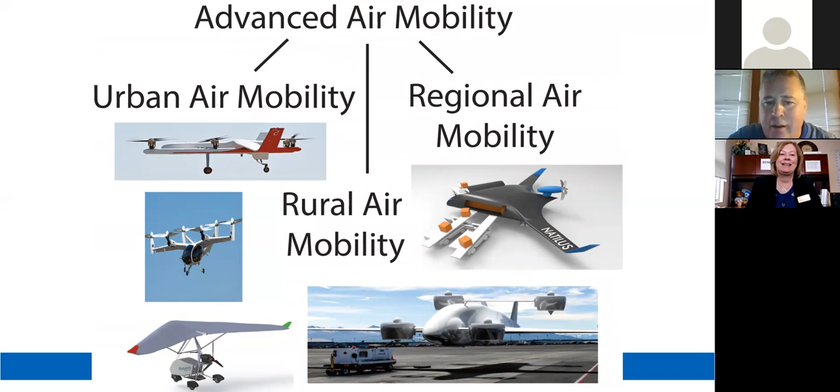So some general assumptions for urban air mobility operations are short distance within and around the metro area, suburbs, exurbs, low capacity vehicles with high volumes of flight, short turnaround between the flights, close scheduling with minimal takeoff to land and route delays, and operating at low altitudes.

So urban air mobility is a subset of advanced air mobility. While advanced air mobility supports a wide range of passenger, cargo, and other operations within and between urban and rural environments, urban air mobility focuses on the transition from traditional management of air traffic operations to the future passenger and cargo carrying air transportation services within an urban environment. So urban air mobility is the transportation of people and cargo in an urban area using a small electric vertical takeoff and landing type aircraft.

And then in 2014, they came out with the Section 333, which was one of the first regulations that allowed commercial applications of small unmanned aircraft, 55 pounds or less, below 400 feet, within the national airspace. And then back in August of 2016, we had the passing of the Part 107 remote pilot certification, which gave more oversight for commercial applications of small unmanned aerial vehicles in the NAS.

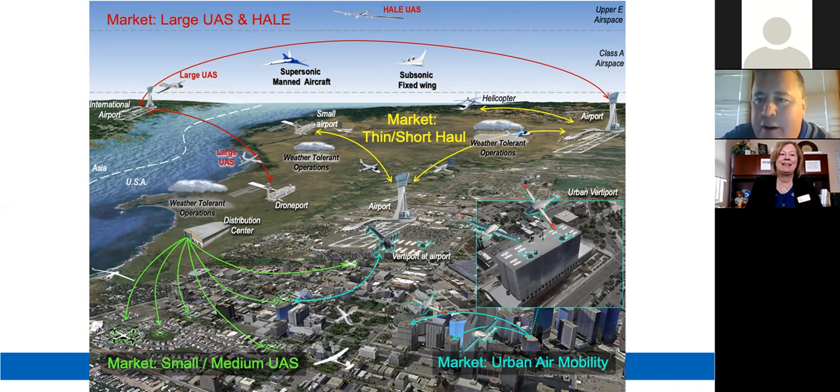And we could see some of the other operations that are happening at higher altitudes and bigger aircraft in Class A airspace, and then above Class A, in upper E airspace with high altitude, long endurance type of unmanned aircraft for communications or surveillance applications.

AAM has a wide range of markets. Based on research I've done, some of the big markets are going to be with military to start off with, and then remote areas, ship to shore, transportation of cargo and people, emergency medical supplies, evacuations, law enforcement operations, news gathering, weather monitoring, and ground traffic assessment.

So before we take a look at advanced air mobility operations in the NAS, it is important to evaluate the current state of the U.S. national transportation system to help determine potential markets for AAM air carrier operations. For example, looking at trucking delays and congestion areas and determining if advanced air mobility operations should be considered as an alternate mode of transportation for areas where there is a need for cargo but no airports, roadways, railways, or waterways to deliver it.

Examples could include northern territories of Canada, remote areas of Alaska, or remote areas within the United States. Another benefit of the research I've been performing is that it could reveal advanced air mobility niche markets and find potential lucrative AAM air carrier supply chain routes. Any disruption in the transportation supply chain caused by weather, no infrastructure, poor infrastructure, trucking congestion, or driver shortages could be possible market opportunities for LUCA air carrier operations.

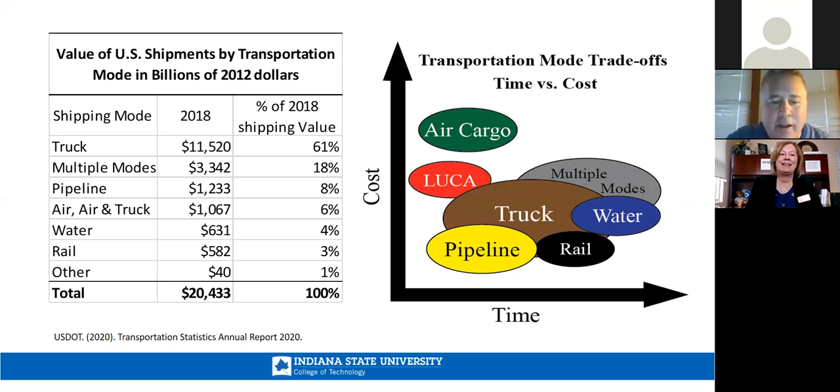As we can see, truck has the biggest oval and it encompasses the biggest shipping mode. Multiple modes just means it's gone, say, by water, truck, or train, and then back to truck to your final destination. Then you can see the red oval for LUCA. That's where I forecast the cost will be much lower than air cargo operations, but the time it takes to deliver cargo from point A to point B will be much less. So that's where I see the market for large unmanned cargo aircraft.

A recent paper from NASA suggests that the smaller local airport you may not have previously known existed will soon be a catalyst for change in how you will travel. Regional air mobility seeks to fundamentally change how we travel by bringing the convenience, speed, and safety of air travel to all Americans, regardless of their proximity to a travel hub or urban center.

And most people, just like I was saying, live within about 16 minutes of an airport. Yet 1.6% of all trips between 50 and 500 miles are taken by air, so only 1.6%.

There are over 5,050 underutilized public use airports. While we have all those airports, the FAA continues to fund them with $3.2 billion in annual grant funding to these local airports. And despite that, only 0.6% of US airports currently support 70% of domestic air travel here in the United States.

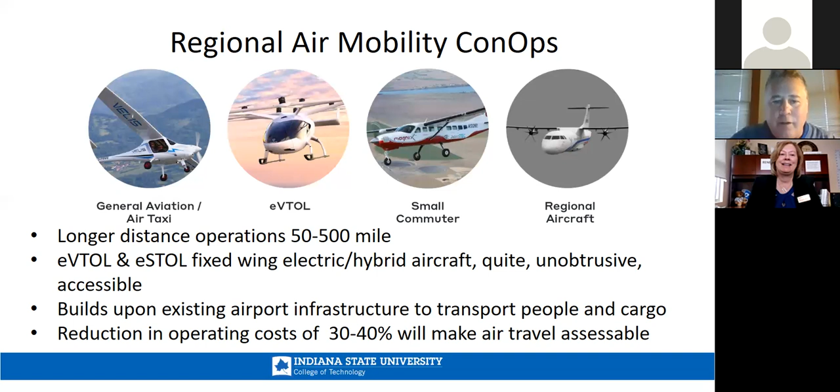One of the key drivers here is reducing the cost of maintenance and overhead by 30 to 40%, and that can be passed down to the travelers, the passengers, equating to much lower transportation costs today. That's mainly by electrifying the aircraft and removing the pilot to reduce some of those costs. Electrifying the aircraft removes the ICE engine, the internal combustion engine, which has thousands of moving parts, down to relatively few moving parts. Fewer parts means less maintenance and less cost, so that's one way the industry should get to that point.

So these are other basic principles and assumptions that came out of that concept of operations manual. Urban air mobility will operate within FAA regulations and the technical environment incorporated within the NAS, and will always maintain the safety of the NAS as it is today. Operators cannot optimize their own operations at the expense of sub-optimizing the environment - one key factor being sound, noise, emissions, and costs. We also see that the FAA has on-demand access to information regarding urban air mobility operations.

And then here are some other assumptions. Airspace management will be structured where necessary and flexible when possible. Cooperative traffic management is conducted in compliance with a set of community-developed and FAA-approved community-based rules. The FAA can set the aircraft performance requirements in order to optimize capacity in the NAS.

So that's some of the things that they're doing. In the next few slides, we begin to discuss the unmanned traffic management system that they're going to be implementing.

Some of the key motivators here are strategic deconfliction and tactical separation occurring without direct ATC involvement. Urban air mobility will establish community-based regulations as standards for operation.

NASA has developed and tested detect and avoid alerting logic for unmanned systems called DAIDALUS. They've made recommendations to the FAA, and the FAA are now using those recommendations to come out with standards.

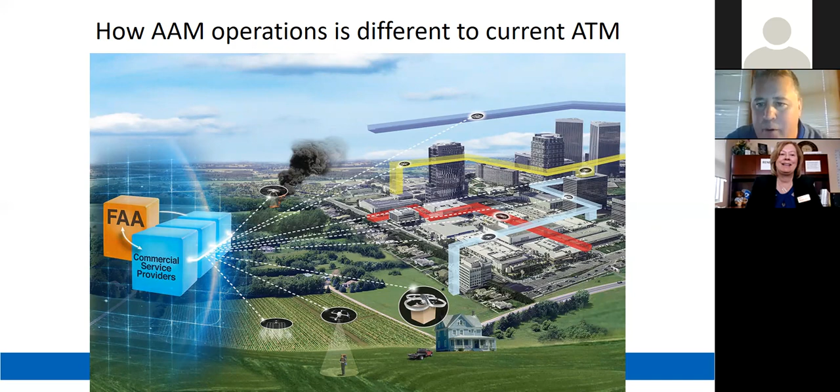We could see some of those corridors in this figure. You could see, in red, yellow, and blue, some of those corridors and how users would go from point A to point B. So, advanced air mobility aircraft technology levels.

This is kind of going over where we're at today. We're kind of at humans with technology within the loop. This means the human is always in direct control of the automation. So that's kind of where we're at today.

And as systems and automation improve, the technology will take over for the human element of it. So human on the loop is where the human has supervisory control of the automation, and the human can actively monitor the system and take control if needed.

And then one of the most advanced forms of automation is where the human is just over the loop, passively monitoring the system and informed by the automation if and what action is required.

So this is where we're going to see two-person cockpits move to one-person cockpits, where the human is still kind of in the loop, but that second human pilot is on the ground in a control center somewhere, helping that pilot in the air.

And it'll eventually be a collection of pilots on the ground in the control center, kind of monitoring and operating a collection of aircraft over time.

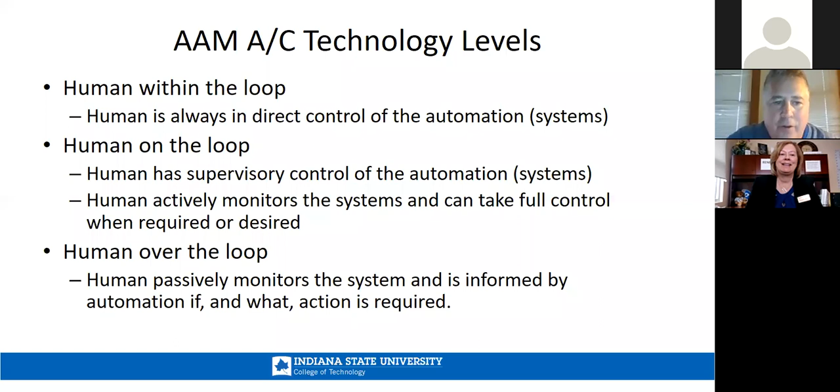And the final form of that automation is where the human is over the loop, monitoring the system.

And here's some of the early to intermediate technology levels for AAM. Garmin has come out with the G3000. This is a cockpit that will probably be implemented in some of the newest and advanced air mobility and urban air mobility aircraft.

The humans will probably do the manual takeoff and landing until the autopilot systems and technology take over. And then pilots will probably use see and avoid in the interim until the FAA have developed the regulations for detect and avoid.

And then detect and avoid -- this is kind of a representative of the DANTi screen that users and remote pilots will see.

The arrow in the front is a representative of the aircraft, and each ring is 5, 10, 15 miles, just depending how far. This gives you a 360-degree view of all the objects, planes, birds, other objects that could be in the airspace.

And it provides advisory to the pilots and recommendations to the pilots. This is an example of a screen that might be used.

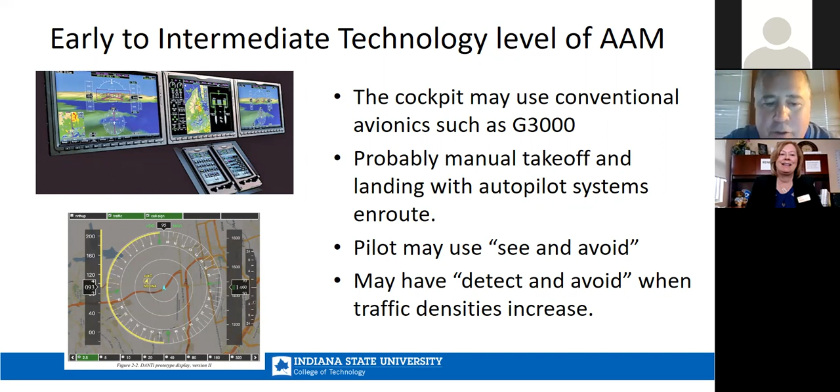This illustration from the FAA showcases different operating environments and types of airspace: G, E, and D airspace. It shows the corridors. To go up through the corridors, aircraft have to pass through 400 feet into Class E airspace, get into the corridor, and as they transition through it, they'll have to descend through that corridor down to land at a vertiport. So those are the types of operating environments.

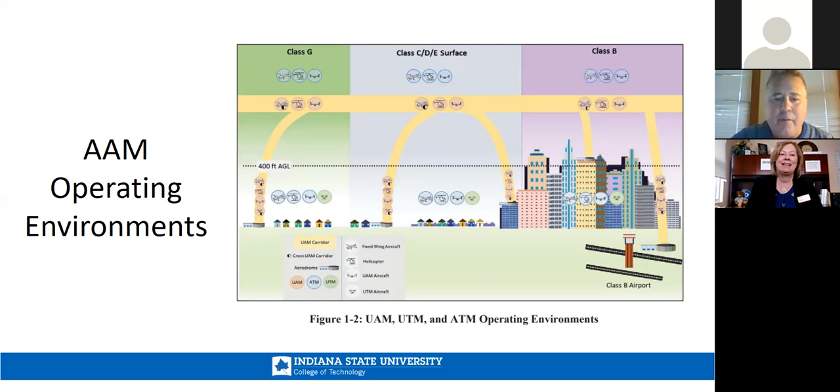As airspace becomes more congested, we'll see them use corridors. Initial operations of eVTOL aircraft will share airspace with other aircraft, potentially on existing helicopter routes or early predefined flight corridors. Aircraft may fly along similar pathways simultaneously and be layered with other commercial air traffic. Pilots will need to manage flights in close proximity to other aircraft and be alert to react should other traffic deviate from their planned routes.

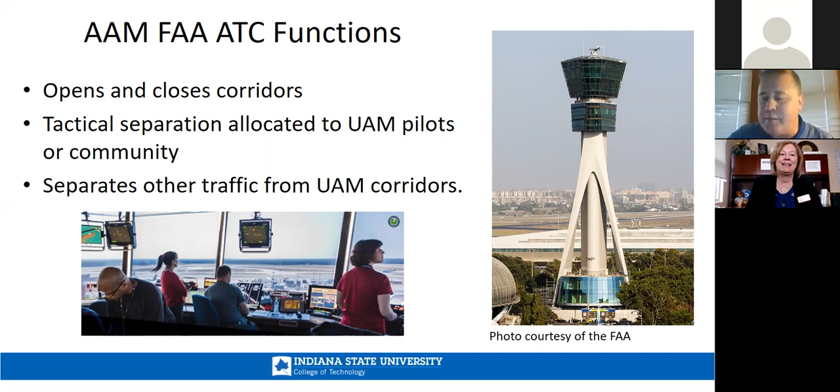So that's kind of the path. Whether that happens in the future still remains to be seen. A lot of research needs to be done in this area to move from voice communications to digital communications. That's a limitation right now today—we still have to operate by voice, especially if there's a deviation in the flight plan.

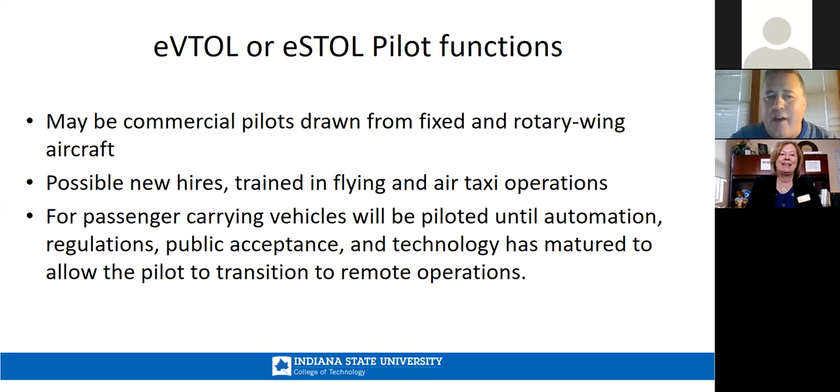So, electric vertical takeoff and electric short takeoff—the pilot functions. The pilots may be commercial pilots or drawn from fixed and rotary wing aircraft. There'll possibly be new hires trained in flying air taxi operations. Passenger-carrying vehicles will be piloted until automation regulations, public acceptance, and technology has matured to allow that pilot to transition to remote operations from a control center.

Flying eVTOL, short takeoff and landing, or conventional takeoff and landing aircraft, UAM pilots will need additional experience to meet the unique capabilities and design of these aircraft. They'll need to navigate in a challenging traffic management environment, coordinate with other traditional airplanes and helicopters, and fly at low altitudes in changing micro weather airspace with noise abatement restrictions. They'll have to operate large amounts of takeoffs and landings in a relatively short period of time. Total flight time should be just between 4 and 12 minutes.

For more advanced air mobility operator functions, those operators will get Part 135 or Part 137 authorization—air carrier or agricultural certification, and in time, as the aircraft get bigger and operations become more robust, they'll eventually be governed under Part 121 operations. Those operators will be responsible for regulatory compliance and all aspects of urban air mobility operations. They will use a flight follower—kind of a glorified dispatcher—who works for the operator and fulfills the normal dispatcher role.

So a little bit about the community compatible aircraft in urban air mobility. It's low emissions, low noise, sometimes steep climb and descent profiles greater than 3 degrees, which will reduce nuisance factors to communities. These include hybrid aircraft, electric VTOL, and short vertical takeoff. Aircraft propulsion can reduce environmental impact, noise, and operating costs.

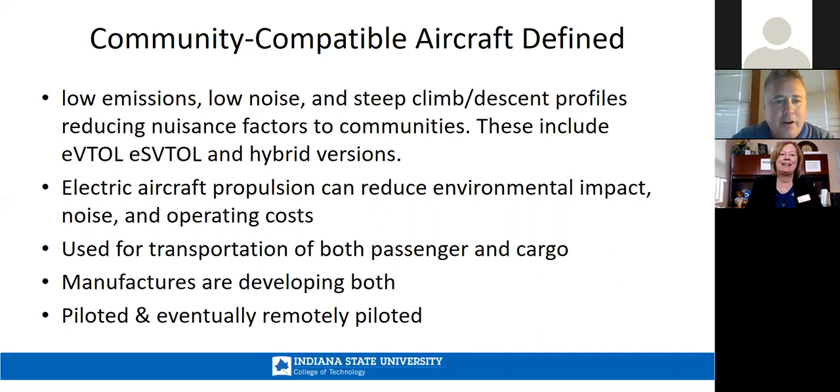Only recently has the U.S. military started using unmanned aerial vehicles to fly cargo. In 2010, the U.S. Navy contracted Lockheed Martin Corp and Kaman Aerospace to build the K-MAX heavy lift cargo helicopter. At that time, the Navy had contracted for two optionally piloted aircraft. They were tested in combat in Afghanistan in 2011 to fly cargo resupply missions for the Marine Corps. The K-MAX demonstrator program was a success, helping keep truck convoys off the road and reducing the threat of improvised explosive devices.

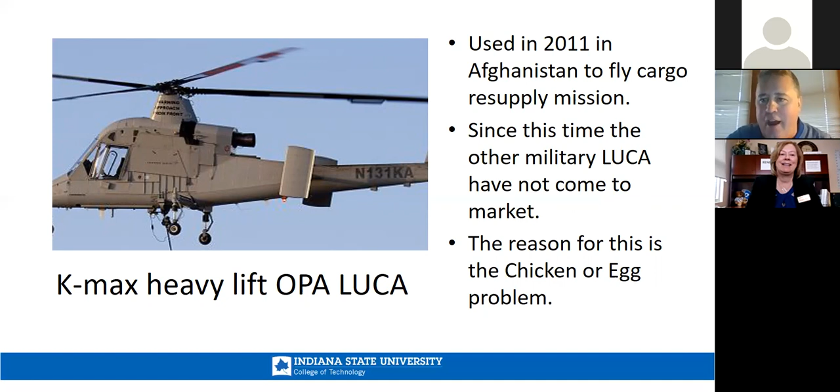Since that time, other military LUCA have not come to market yet. It's still the chicken or the egg problem, but the commercial sector has stepped up the game. We're starting to see that with commercial companies like Reliable Robotics and X-Wing converting manned aircraft to optionally piloted aircraft, starting to do that with large unmanned cargo aircraft.

One of the limitations to getting these regulations passed is the data set. In a manned aircraft, if something goes wrong, the pilot can take over and land it, but they don't necessarily report that data to the FAA. That's the data set the FAA needs to eventually approve using autonomous aircraft in the national airspace.

So what Reliable and others are doing is using a pilot at the helm to take over in the event that automation fails, then record this and report it back to the FAA. They're doing this thousands of times, building the data set to eventually move that pilot to the ground. That's kind of how Reliable and X-Wing are doing it.

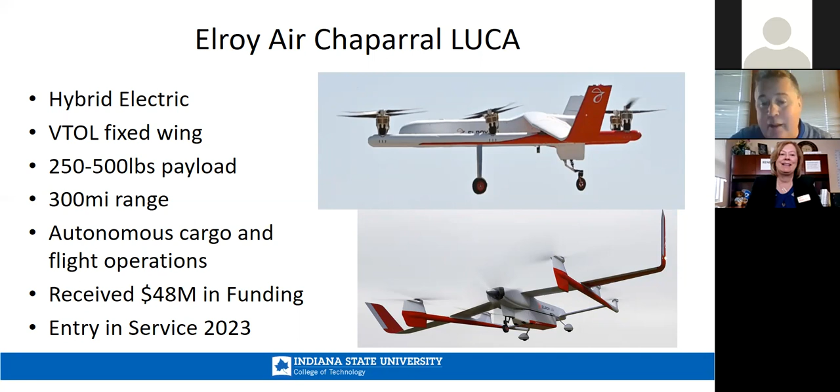One of my favorite players in this industry is Pipistrel, based out of Slovenia. They're one of the first aircraft manufacturers to have certified an all-electric aircraft. They first did it with EASA, the European Aviation Safety Agency, and later it was approved by the FAA, and they're now selling that electric aircraft. They have a lot of experience in autonomous operations, first by converting manned aircraft to optionally piloted, and now they are designing an all-cargo aircraft.

And it has a revolutionary design. You can see it has a wing at the front of the aircraft and a wing at the back. That allows it to have a really large center of gravity. So they can have most of the cargo towards the aft or towards the front and still be within that center of gravity to fly. So I think it's kind of unique.

And there is no stick and rudder flying anymore with these aircraft. It's all pre-programmed before the flight even happens. There are things that the remote pilot can do from the ground to deviate. For example, if there is an object or people at the destination where it's going to land, there is a downward facing camera that can see that, and they can select to land in a different location, which will move the aircraft over to the other location to land. It'll do that just with the click of the mouse.

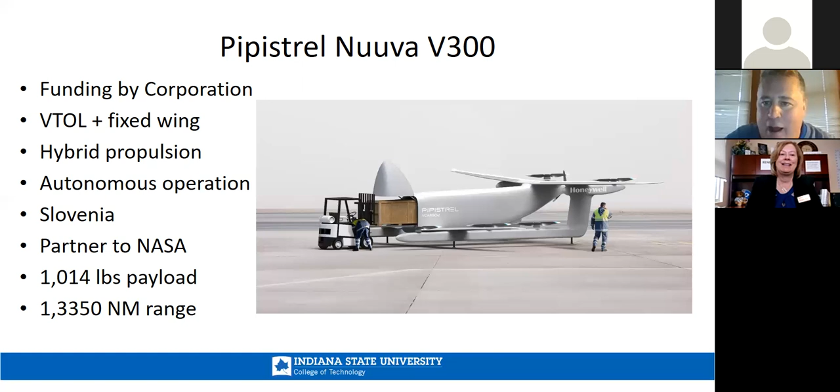And that's where we'll see most of this automation going, where we'll lose the stick and rudder. It'll be just automation, and the users are over the loop, just monitoring those systems and changing it with the click of a mouse.

Here's another one of those cargo delivery aircraft. This is a Sabrewing, I showed you a picture of it earlier, and this is called the Rhaegal. It's a new generation of cargo aircraft, high efficiency, all-weather operations with vertical takeoff and landing. It's designed to carry payloads up to 5,400 pounds, delivering 2,000 over a distance of 1,000 nautical miles, cruise speed of 200 knots. The cargo bay can easily be accessed through the nose, just like you saw on the Nuuva 300. They can use LD1, LD2, LD3 cargo containers, or just put on pallets.

This design is pretty revolutionary. As you see, it's got ducted fans. It's going to be using a turbine, powering a generator to bank batteries. It's a hybrid type of aircraft. They do have a prototype, but they haven't flight tested it. They have received quite a bit of money, 2.8 million so far, and they have orders from Saudi Arabia Airlines for over 100 of these.

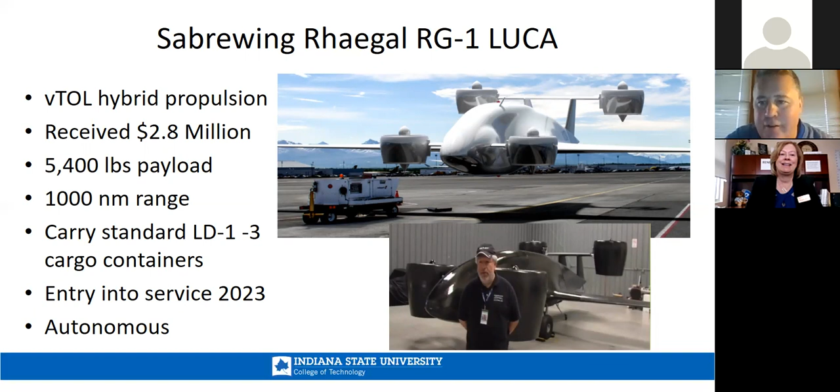And one of the biggest leaders in this market is Joby Aviation. Joby has received 1.8 billion in funding. This is the design of it. The propellers have been designed to have lower noise. The noise a lot of these aircraft will emit is designed to be right at about the same decibel as background noise in a city, so it shouldn't be much more than the background noise. This will enable them to get in and out of areas they couldn't get to before because of noise abatement.

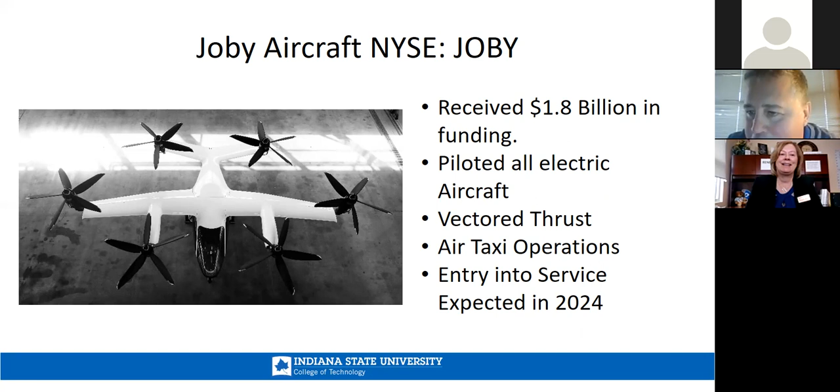They have a plan to enter into service by 2024. I think that's a little optimistic because, as we know, if you're in the aviation business, the regulators tend to not move that quickly. They're taking a crawl, walk, run approach. So they expect to be in service in 2024. I'm not sure that'll happen, but we'll see.

And another one of these major players is Lilium. They're trading on the NASDAQ. They've received over 511 million in funding. They plan to service both cargo and air taxi operations. They're using a vectored thrust type of propulsion. As you can see, there are no propellers. They plan to enter into service in 2024, and they have a couple of these already in prototype and testing phase right now.

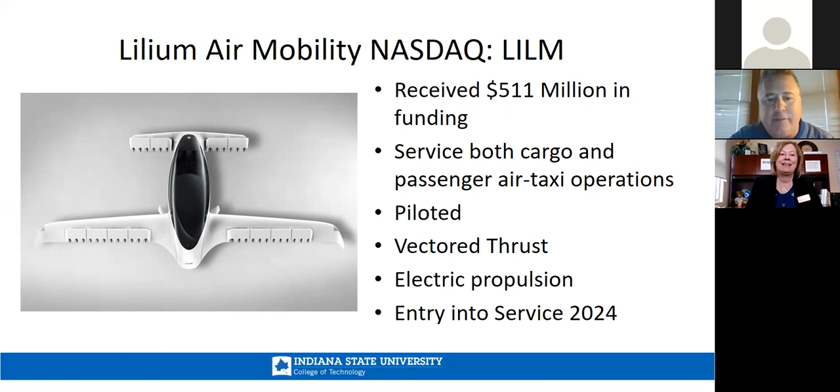Another big leader in this market is Archer Aviation. They've received 856 million. United Airlines has partnered with them to fly routes from JFK to Manhattan in 10 minutes. They have electric propulsion. It's planned to be piloted, entering into service in just a couple of years from now. 60-mile range, 45 decibels, 150 miles per hour cruise.